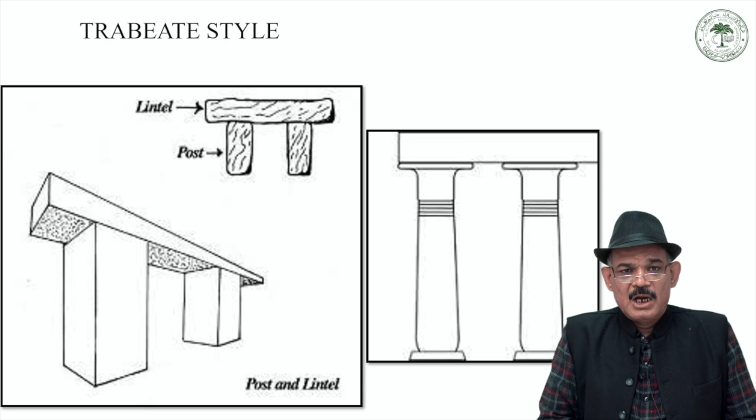So before studying the buildings, we must study the various architectural techniques that prevailed before the invention of RCC. The most important technique started from the emergence of towns or habitation, when men started to live in a house type of structure; this trabeate technique prevails from that time. What is the trabeate technique? It is composed of a post and lintel.

It is very easy. You created two pillars and kept a single piece of stone or wood, and now this space has been covered. Historically, architecture signifies how to cover the space, and this covering of space must have some aesthetic sense and provide full functionality.

So now in this structure, you created two walls, and the span between these two walls has been covered with a piece of stone. In place of a roof, we put slabs of stone, and this structure was built in no time, and this technique has its own merits and demerits.

The merit of this structure is that it does not use shuttering, the temporary support to create the roof. The result is that it is not costly. It does not involve a big cost. You simply created the walls of the room, and in place of the roof you put single slabs of stone one by one, and you were able to construct the room.

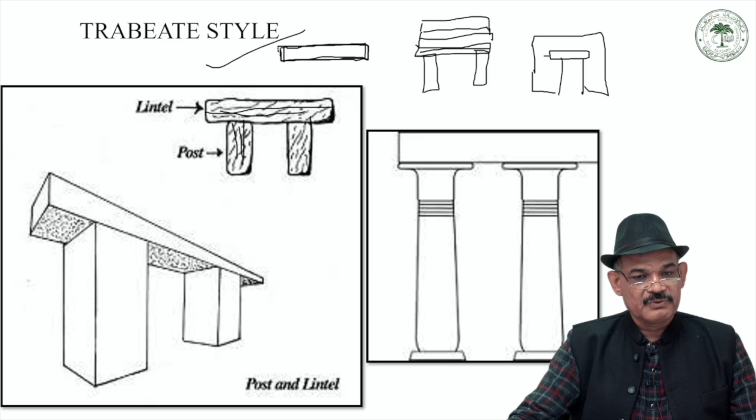Now through this technique you cannot cover a big space because of the limitation of the length of the piece of stone and piece of wood. Through this style, such types of structures were built. Now you see, there is a room, in front of the room there are cloisters, and these are the pillars, and lintels have been used to cover the span between these pillars. These pieces of stone have been put together forming the roof. In the same way, this is a room at the back, and its roof has been created by putting slabs of stone one after another.

Because of the limitation of the length of the stone or wood which we can procure from mining, we cannot cover a big space. The covered space is smaller, not very big. Otherwise, we have to put a pillar in between. If we take the example of the great hall court of Chandragupta Maurya, in excavation a very spacious hall has been discovered, but this hall has 80 pillars inside. Only then was this hall created. Without these pillars, such a long roof would not be possible.

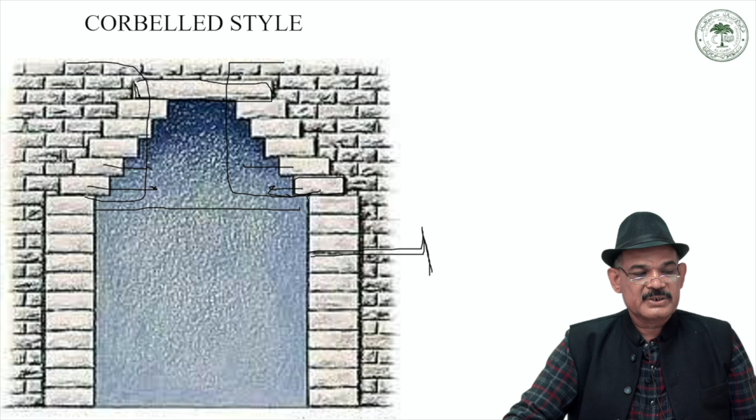This technique has its own plus points and minus points. Of course, through this technique, we can cover a bigger space in comparison to the Trabeate style. But what are its defects? When we use pieces of stone or brick projecting to the inner sides, the thickness of the roof increased enormously. When the thickness of the roof increased, it exerted pressure on the walls. To bear this burden, the walls also became very thick. It made the structure ponderous and used too much building material. A lot of space got wasted in the thickness of the wall, and a lot of material got wasted in the thickness of the wall and the roof.

Second important problem with this style is that it is not friendly to the gravitational force. In the course of time, this structure gets collapsed because it is not able to transfer its burden to the walls. Since it is having a huge burden, this weight is never transferred to the walls, and in the course of time, gravitational force destroyed this way of corbelling.

A number of chaityas in India were built with this technique, but slowly and gradually they all decayed. That's why we get a few masonry chaityas today. And this style cannot be used individually.

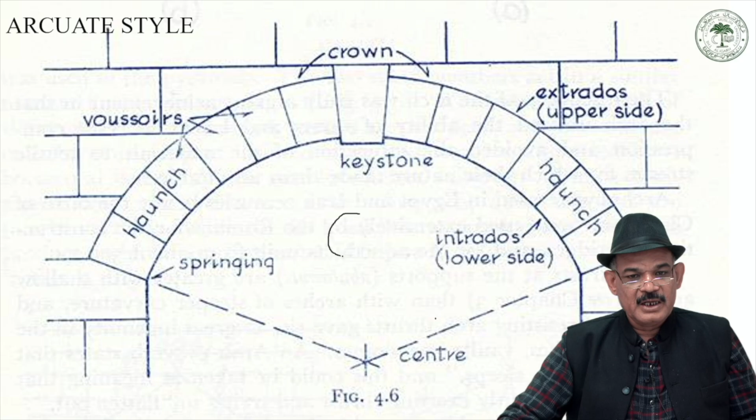They invented this arch. There is a principle: if there is a circle and you put pressure at one point, this pressure is never exerted directly on that point; it gets deflected on both sides. This principle is used in the case of the arch.

This span is now covered by making an arch. A true arch is composed of a keystone and radiating stones, which are also known as voussoirs. One thing is essential: if we use six voussoirs on one side, we have to use six voussoirs on the other side as well, and a keystone is used.

Through this technique, one of the biggest merits is that we can cover a bigger space, much bigger than the space covered by trabeate or by corbelling.

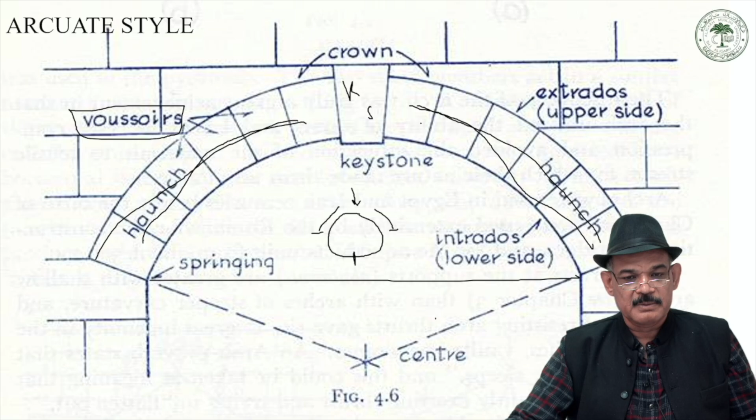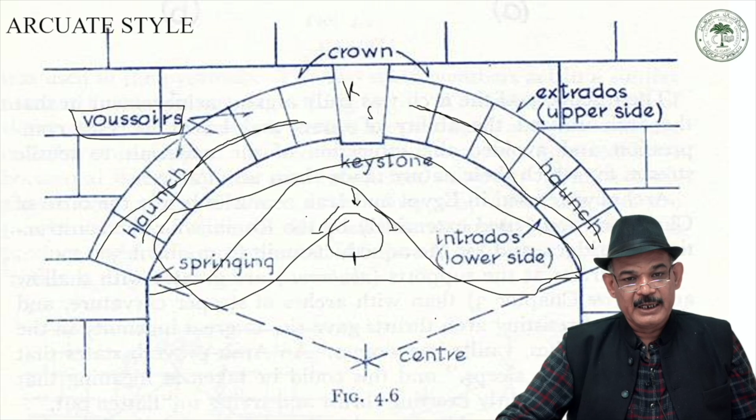Secondly, this technique is very important for building structures, but it is costly. Because when we build this arch, before building it we have to place a temporary support. In this temporary support we have to use calculations to make an exact half-circle arch, then we put all the components of the arch in place, and after some time this temporary shuttering is removed.

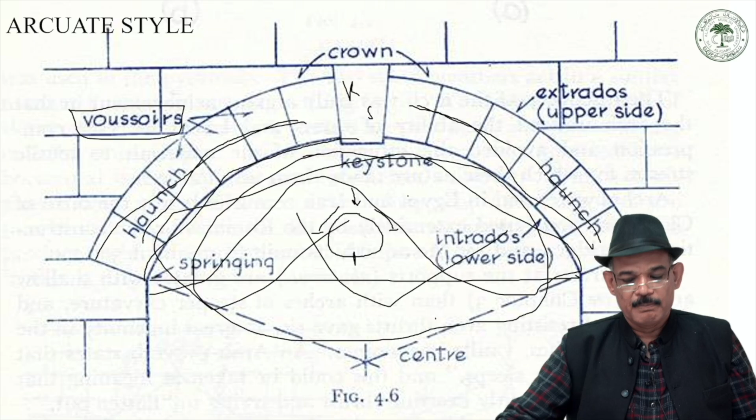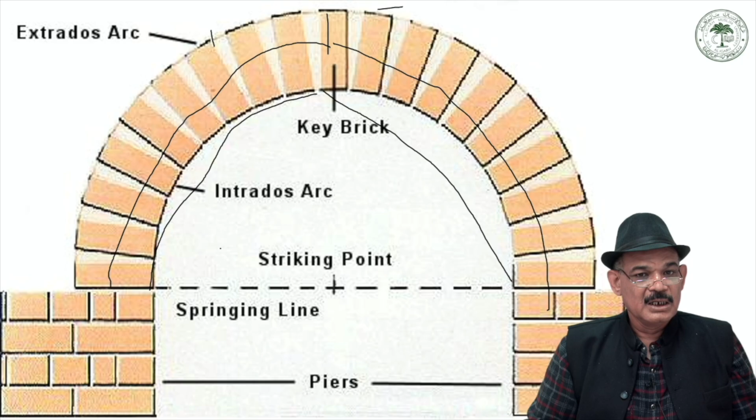Then this arch is able to bear its burden. If there is pressure or weight on the arch, it is automatically deflected or transferred to the walls from where the arch springs. But it is a very costly affair, needing mathematical calculation. If any calculation in preparing the shuttering gets defective or incorrect, the whole arch can fall down in the course of time. That's why creating an arch requires mathematical precision and expertise.

Now what was happening? These arches migrated from Rome. In Central Asia, there was no such expertise in mathematics as the Romans had. So these half-circle arches transformed into pointed arches.

In case of the pointed arch, we don't need such precise mathematical calculations. We prepare a shuttering, and a pointed arch has been created, having keystones and equal voussoirs on all sides.

From Central Asia, this pointed arch migrated to India. During the medieval period, this arch was used almost in all the imperial buildings, and in all the buildings and monuments known for their perfection, the true arch is used.

On the concept of arch, we created the dome. When we rotate the arch, the courses of voussoirs come from all sides and it takes the shape of the dome, with a single keystone at the center. Voussoirs come from all sides, and in this way this arcuate style was created, revolutionizing the building concept.

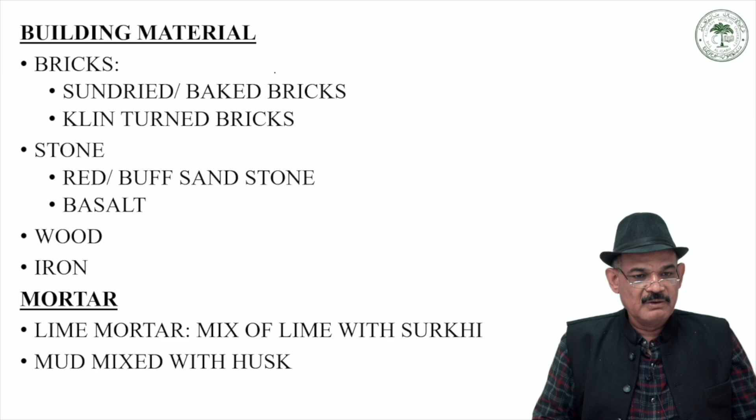But these are the mortar and building materials available and used during the medieval period, especially from 1526 to 1757. Thank you very much. I conclude.